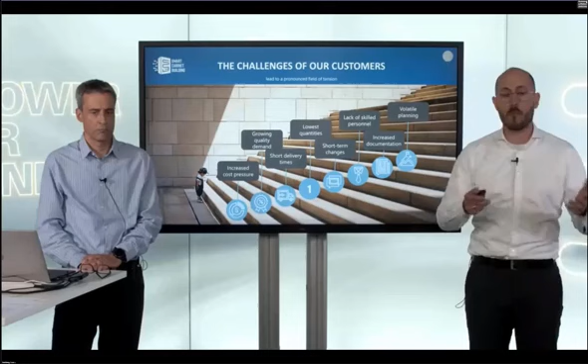From our point of view, the best way to overcome these challenges is to combine competence and know-how. And that is exactly what we do with our Smart Cabinet Building Initiative. Inside this initiative, we have Weidmüller for the industrial connectivity. We have Komax as the leading company for automated wire processing, Zuken for the digital engineering of cabinet building, as well as Armbruster Engineering for the assistance systems for manual production.

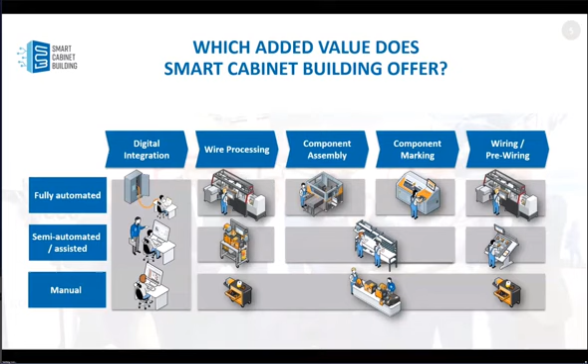Additionally, the benefit for you is we want to offer you a huge basket. From our point of view, it doesn't make sense to convince each customer to go directly the way of fully automated systems. Our target is to show you the whole range, starting with manual solutions, going further with semi-automated as well as assisted solutions, and for sure ending with fully automated solutions. And no matter if we are talking about wire processing, component assembly, component marking, wiring and pre-wiring, and also the digital integration, we want to look at your individual needs, and based on your needs, we want to create the right package for you.

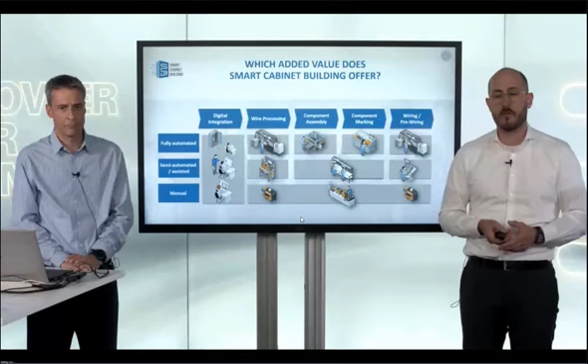I'm from Zuken, and I will show you a little bit what you can expect from the next 60 or 70 minutes. I want to start to explain with this small cabinet. Gordon, please switch. Exactly. We all wanted to meet at the Hanover Fair. This was not possible, and so we try with this event to give you a nearly live impression of our solutions. And we explain it all in the next 60 minutes with this example.

This is a cabinet with about 100 components of different types and different manufacturers. We have terminals, we have relays, and so on. We have plugs, and we have different connection types: push-in, cage clamp and screw connections. We have about 50 wires in this example, of 6 different combinations of cross-section and color. So it is a small but hopefully representative example, as you know from your daily work. So this is our physical example, and switching back to our solutions.

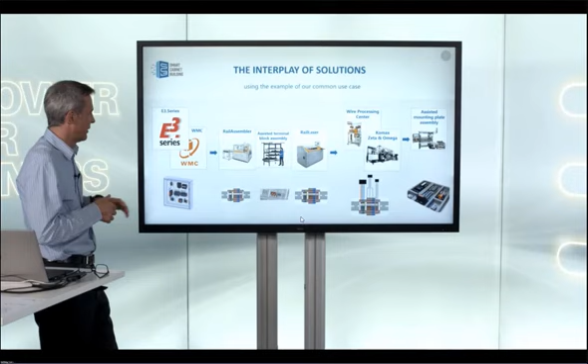And so this is the first step, how we create a digital twin. Then we will export the necessary data to the RailAssembler and to the RailLaser and to the ELAM'a workplace to complete the terminal.

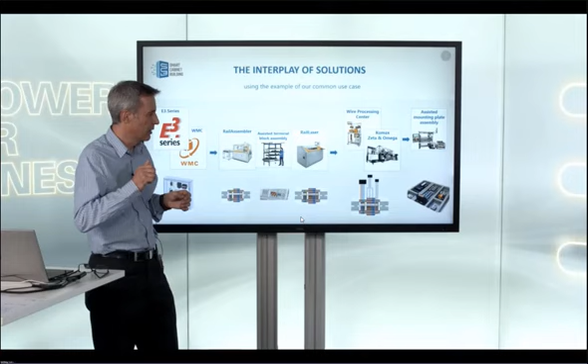After that, we show you how we can export very fast the necessary data for producing wires in 2 different ways. In a high-end solution on the Komax Zeta or Omega machine, producing bundles in a sequence order. And on the Omega, we can also show you how they will be pre-wired on the machine. And another type of producing wires is the wire processing center.

We show you also. And if we have done all the pre-production steps, then all the components and pre-assembled products meet at the assisted mounting plate assembly. And as well for this, we import or export some necessary data for this workplace. And there we have also a nice solution how the worker can assemble a cabinet without any paper in a very smooth and smart way.

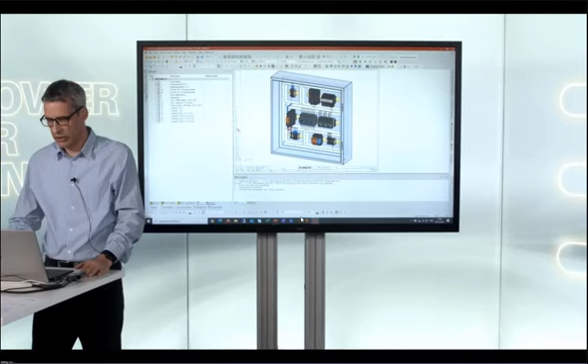If you don't get such a nice digital twin, don't be worried. I can show you how fast and easy it is to create one from scratch. I want to start with an empty project, so you can see it. There are no devices, there are no components in, just 3 empty sheets, and this is really our starting point now. There are various possibilities how to get such a digital twin.

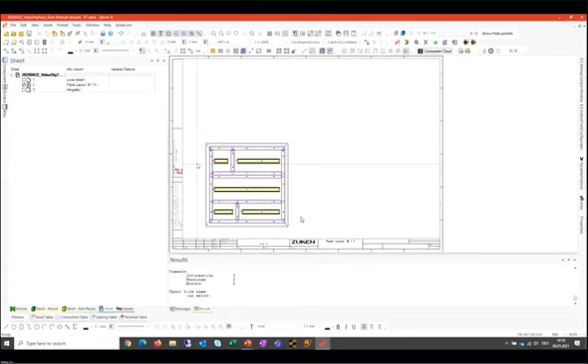As one example, I will start with a so-called template. I import an assembly of my mounting plate, and with this template, all the necessary components are loaded. We have the mounting plate with the cable ducts and the rails all mounted, finished, so we can move them, or we can change them, we can delete, we can add. If you have a typical template for such mounting plates, you can save them as a parts file and import it very fast.

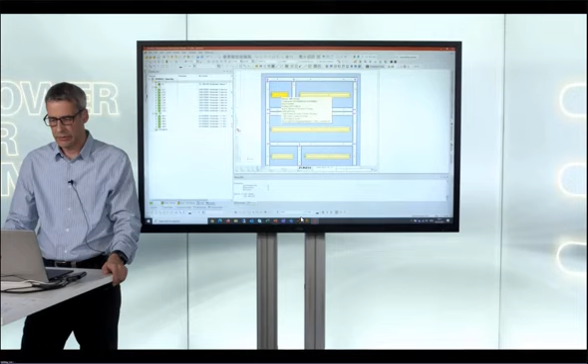So at this moment, we are able to export all necessary data for mechanical production. We can export data for mounting plate drilling machines, and for length cutting machines of cable ducts and mounting rails. So all the data is done. We know this is a one-to-one drawing, and we know exactly all the lengths and the mechanical data.

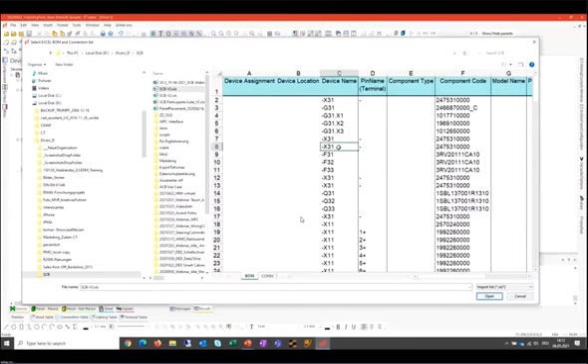Continuing with the import of the electrical components. In another example, I want to import this bill of material, these components, from, for example, an Excel file. Hopefully you get this from your clients. The minimum requirement is that we need the components, the article number of the products, and normally you should also get a device designation. If you get those, we can import it, and you can see now the 90 additional parts are loaded.

My tree is getting longer and longer, and in the same way we also can import, for example, a wire list. Also here the minimum requirement is a from-to list. We need the source and the destination pin. If you get from your customer the color and the cross section or a signal name or something else, that's fine. It's nice, all the better. The minimum is a source and a destination.

So in my case, I'm a lucky man, I have some additional information. I import it, and so now we have 46 wires imported, so they are also now in my tree, and now I have to place them.

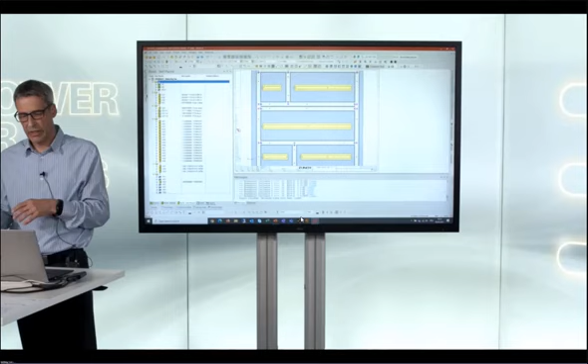If you get some data coordinates in your bill of materials, where the components are to be placed, then we can do it also automatically, but typically you don't get the coordinates, so I will do it manually, and this is very fast. I switch to the panel unplaced tree. Here are all my components I have loaded in my project, and now I can start placing them by drag and drop. Yeah? And you can see it's easy.

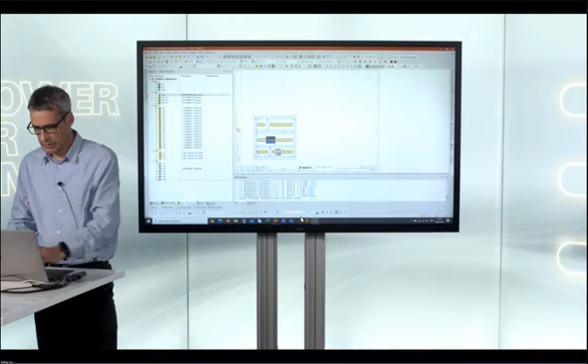I can do this in 3D, or I can do this in 2D. It doesn't matter. I can do this with single components, or I can do this with a multi-select, like here, all the relays of the term series. You can see these pink marks where I can place them, so they switch automatically.

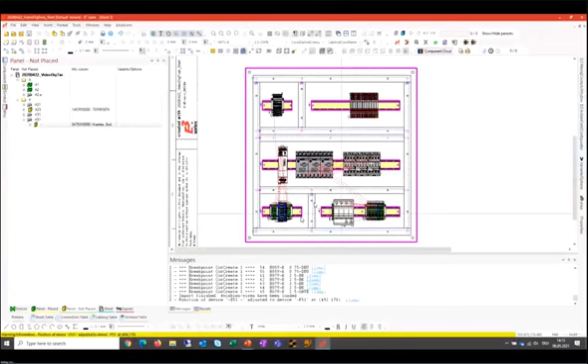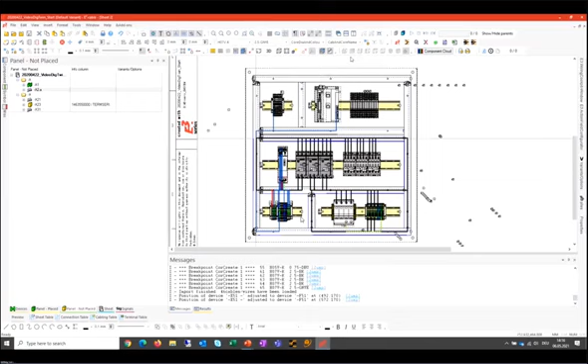And you can see also the red air lines. These are the connections. Yeah? We know from our wire list where we need some connections, and my E3 auto connect, if I start it, helps me do the auto connect in the shortest valid way. So we have now all our logical connections switched to physical connections. Now we know all the lengths, we know the cable duct fill degree, and all the other things. And now we are really nearly prepared for the next steps.

Digital twin is finished. I had some components left, but believe me that I can do it if I have 30 seconds more time. But I want to save this because now I export these two rails with all the components to assemble on the RailAssembler and on the RailLaser. So we export mounting rail 4 and mounting rail 5 to the Weidmuller configurator, starting automatically. Project is successfully created.

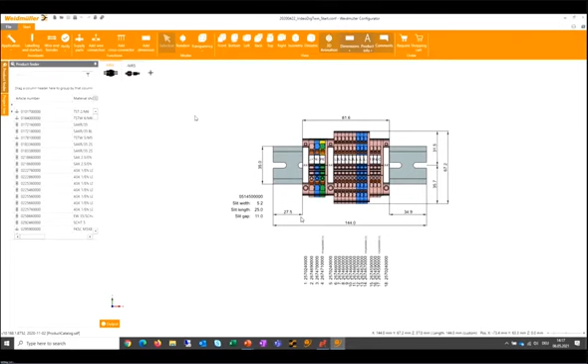Takes a few seconds. And now you can see, okay, I have imported exactly mounting rail 4 and 5, with all the components in the correct order, with the correct labeling, with the correct distances, like in my digital twin from E3. And now we can do some optimization. In this case, I rotate the marking text 90 degrees and make it bold so that it is a little bit easier to read.

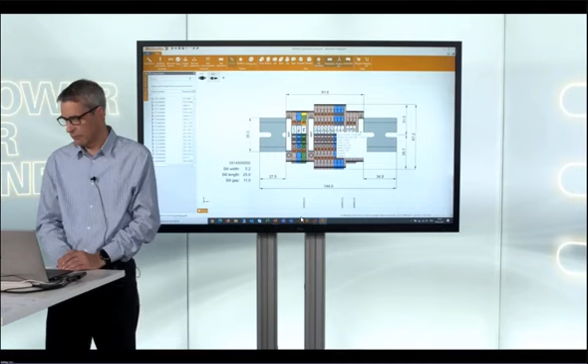And now I'm finished, and we can export this exactly to the RailAssembler, to the assisted workplace and to the RailLaser. And with this, I want to switch to the shop floor. Christian, it's your time.

Welcome back directly from our factory, where I want to present to you more details about our RailAssembler. But first of all, I think Achim already explained to you very nicely how we can come to the digital twin and how we can create all relevant information. So I would ask Luca to directly start with the production of the first DIN rail. Our RailAssembler is our economical answer for the automation of the process step of terminal block assembly. Our machine has overall 40 component magazines as well as 18 magazine places for pre-cut DIN rails.

Based on the individual order, the relevant pre-cut DIN rail is selected, transported, and we are placing directly the first terminal blocks on the rail, which we can see right now in the camera. Maybe you see the difference when you have a look at the component itself, because we are using our A-series terminal blocks as a so-called DL version, which already have pre-assembled blank markers on them for even more efficiency later during the fully automated marking process.

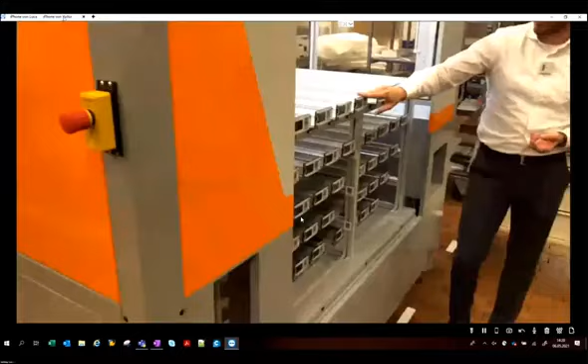My idea is we use the time while the machine is assembling the fully equipped DIN rail, and I want to explain some more technical details on the machine, and therefore I would like to ask Luca as well as Victor to come over to show our first small detail of the machine. The first detail, which is very relevant, is our universal component magazine. I said we want to design an economical solution for the automation of terminal block assembly, and one aspect there is our magazine.

This magazine consists of a reduced DIN rail profile, and based on this DIN rail profile, we have several advantages. For example, this magazine type can handle different kinds of contours. Luca, would you like to show it? So it doesn't matter if you have small terminal blocks or even bigger ones, you can use the same type of component magazine. And that is really an advantage compared to approaches where you have side guidance and a one-to-one relation between the component and the magazine type.

You already saw that also during the filling process, no terminals can fall down or out. Also, the loading volume is extended to 200 terminals, 2.5 millimeter cross-section, so that we avoid open quantities and can directly put all components in one magazine.

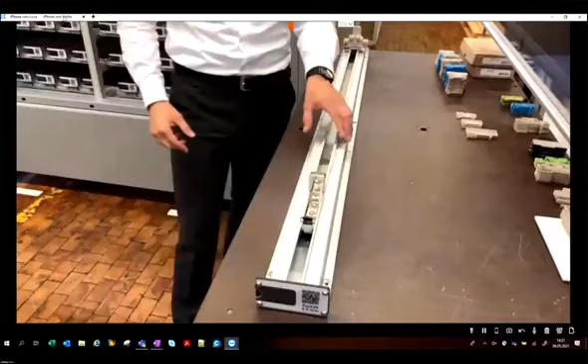Then one additional, from your point of view maybe small, but from our point of view very important point is, at the end of each component magazine, we have an area where you can put inside your individual marked and printed card with further information, maybe a picture of the components, maybe additional codes for your individual warehouse handling and so on. And that is from our point of view a small advantage which really helps you during your daily business.

Okay, so the machine is still operating. During that time, I just want to show you the area where we can find these 40 component magazines. Here we have the area for these 18 pre-cut DIN rails. The DIN rails can handle a length of 100 up to 1,200 millimeters. And if you have only small ones, you can put several on the same position. So in the end, we are talking about 18 parking places where you can put up to 1,200 millimeters inside, and it depends on your individual production order how many pieces you can put there.

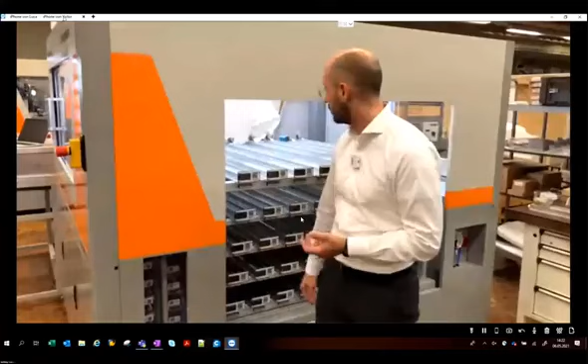So the first DIN rail is produced. Maybe Luca can take it out of the machine and we will show it to you. It's just transported to the end. And you can see it's exactly the same specification as Achim designed just a few seconds ago. Then there is a second DIN rail configuration. There I would like to ask Luca to directly start the production, and we will go back to the area where the robot is assembling.

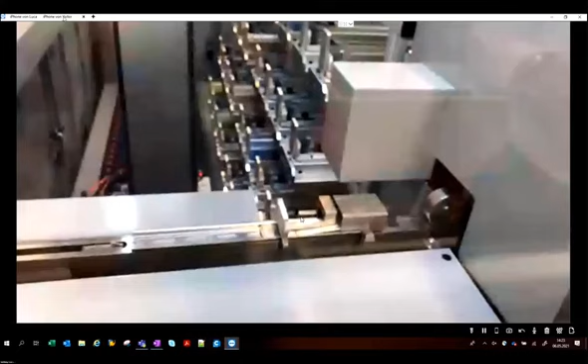Sorry for the camera confusion. In several DIN rails we have the topic of how we can handle components that aren't robot-ready, that aren't grabbable with a robot. In our approach, we give the information which components the robot can't handle to the assisted workplace of Armbruster. And this machine ignores these components, which will be assembled later with the assisted workplace solution. So you can see at the beginning we have the free space where we can later put the missing components, and that we want to show you later during one live session.

I think based on that, we understand the principle and we see how the machine is operating. We are talking about a time efficiency increase of up to 60%, which comes mostly from the individual commissioning of components and all the other steps around. The mounting itself, we are realistic, humans can do it at the same speed or even faster. But please keep in mind, if you load up all magazines in the morning, we are talking about several hours without any manual interaction.

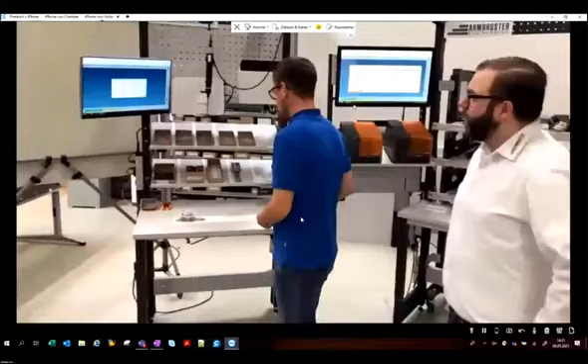All right, now we are at the component assembly, where we have the two pre-assembled terminal rails right from the RailAssembler, and we will finish them here at the component assembly station. To do this, we need to scan the production order number, and then we will see step by step the generated work instructions coming right from the export file of the digital twin, showing us where we have to place the components. We can see here that the cross connectors are assembled. And with the ELAM system, we check every step and guide the worker through the work instructions.

We also are supported by a pick-by-light system, so the worker knows where he has to take the cross connectors out. He's confirming every step at the ELAM panel and is now going through the steps one by one. The first rail is ready, and now we take the second one. Here we have a little bit of a different

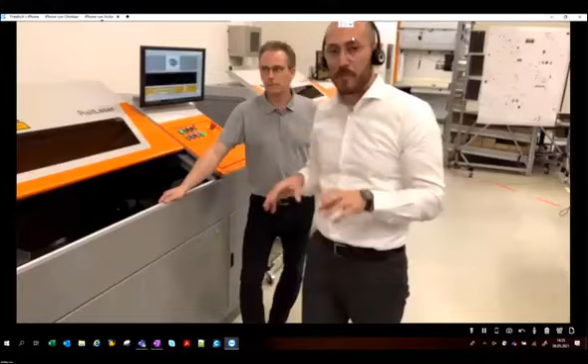We will compensate it later through our presentation, but now we want to continue with the topic of RailLaser printing. So Timo just showed you how we can assemble further components and accessories. We have now the assembled DIN rail that we already saw on the RailAssembler. And the good thing is, if we have the RailLaser there, the only thing which is still required for the automated marking processing is putting the DIN rail inside, fix it, and press the start button.

Again, we have there all relevant information from the digital twin that Achim initially generated in E3 series and then handed over to the Weidmüller configurator so that all information is understandable as well for our RailLaser. Our RailLaser can handle DIN rails with a length of 100 up to 1,200 millimeters.

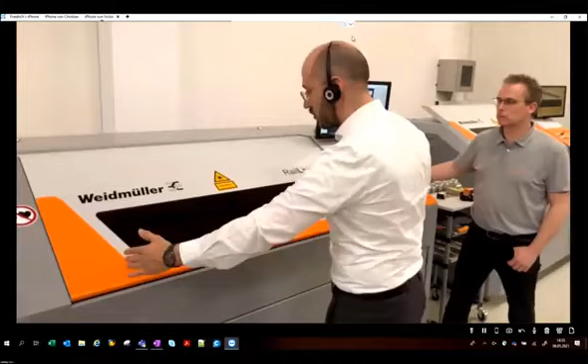And the real difference is that before we are conducting the marking process, we have there an image processing system inside that is analyzing for each marker the real position, compares this position with the digital twin, and is conducting fully automated the required adjustment so that we can really be sure that we mark directly in the middle. And we are doing this from several sides so that we can also, for example, reach markers that are in a gap between bigger components.

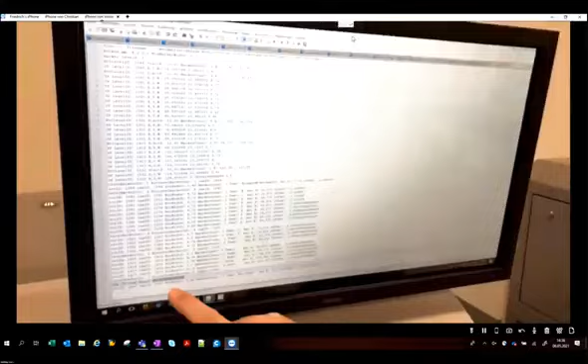And you can see here in the screen that, for example, for the end brackets, we are still analyzing two positions. And based on that, we even analyze the angle compared to the DIN rail. Stefan is showing you now an example how we can do the correction. And we also can show you the real information that is analyzed by the image processing. For example, in this case, 90.97 degrees is the angle of the marker relative to the DIN rail.

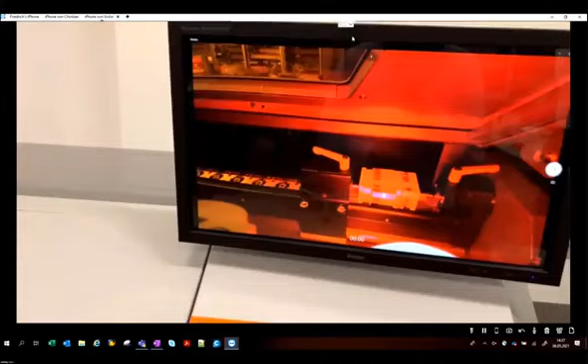In the background, the last steps of the image processing analysis are conducted, and the machine will start then with the layout generation, where we are analyzing which markers can directly be reached without any mechanical movement. And now you can see directly inside the machine with a webcam, and you can see that the laser marking itself is quite fast.

And one additional benefit is, based on our laser source, you can use our standard marking material. So you don't need to have any special marker material for the process step of the automated marking. You can use the same marker also like for our PrintJet. For example, if you need to print anything in color, I think it makes it much easier for you.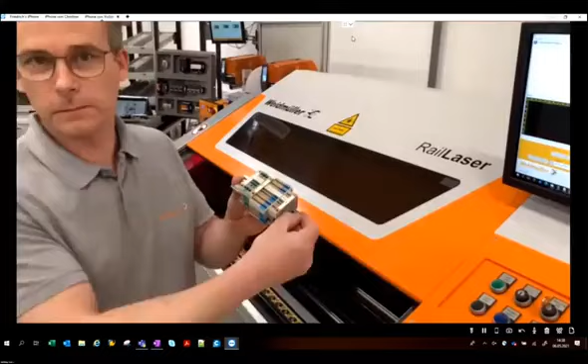So the first marking process of our first DIN rail is nearly already at the final stage. Just the last markings, door is opening, and there we have the final DIN rail, which Stefan is now showing to you directly in the camera. And you can see there that we have a very sharp contour and really precise marking all around the DIN rail. So that was just our first example.

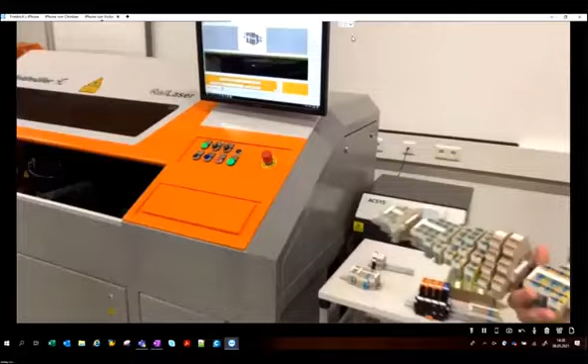I want to take the time and show you a little bit more the universality of the machine, so which kind of different terminals we can handle. We can handle for sure big ones, small ones, and exactly also this kind of gaps or deeper areas we can also reach with our image processing inside. But we not only can mark terminals, we can also mark, for example, overvoltage protection components. Exactly this one that a few minutes ago Timo and Malte showed us at the assisted workplace of Armbruster Engineering.

So Stefan is also putting the DIN rail inside and pressing the start button again. We show also the operator a preview so that it's easy for him to put the DIN rail inside in the right position. And then again, our procedure with the image processing is starting and analyzing.

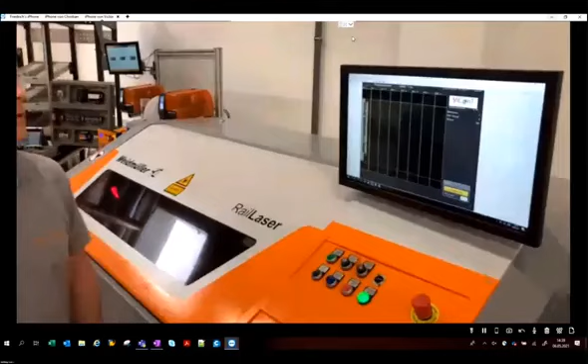One additional benefit is that the marking itself has some advantages because it's very robust, and not only on the rail. We can maybe show you some more examples and a little bit about the topic of time efficiency increase based on the DIN rail that we have put inside the RailLaser.

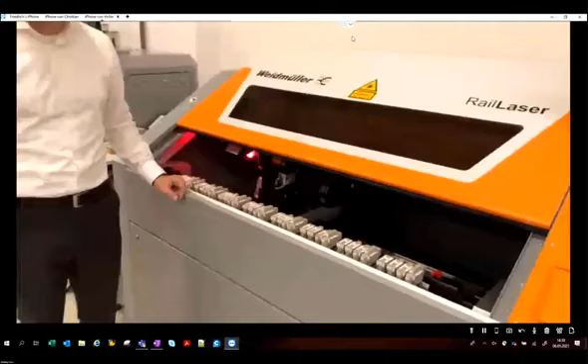This DIN rail is 1,200 millimeters long. The manual production time for this DIN rail is roughly 60 minutes for finding the right markers, printing the markers, snapping them on, and having a final inspection. With the RailLaser, we are only talking about 6 or 7 minutes for the fully automated marking process. We also have some more examples of different contours, different configurations, different sizes that really show the universality of the RailLaser.

Maybe you are asking, okay, nice, we have the A series DL version, but what if I need a component and want to mark it with the RailLaser where Weidmüller is not offering a DL version? Then my answer to you is, you can also put the blank markers on it manually. And even then we are talking about time savings up to 60%. For sure, compared to the 90%, it's a huge difference, but I think even the 60% is really a benefit.

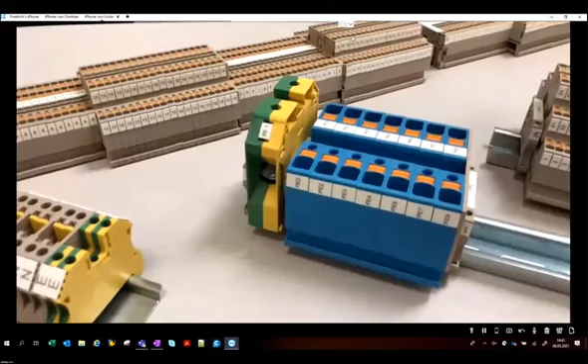And if you remember the video that we showed during the first coffee break, you also see there that we are using our image processing for checking if the assembly, especially of the markers on the terminals, is done in the right way. And we are guiding the operator if something is wrong. Based on that, we have more or less a dynamic quality inspection inside. And that is also, I think, a big benefit for you as well.

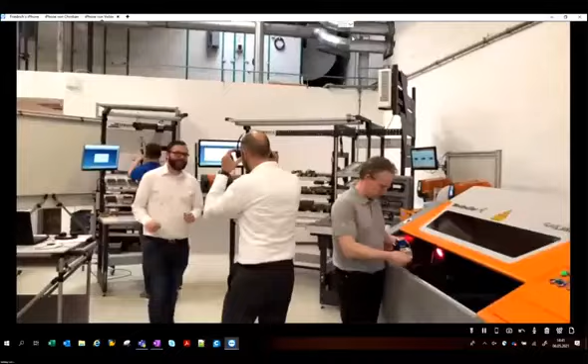Okay, so that's just a short explanation regarding the RailLaser. My proposal is, since you couldn't hear what Timo was saying, we just repeat the session directly at the assisted workplace, because I think it's also very interesting for you to understand it. I will hand over the headset to Timo again. Thank you very much, Christian.

So yeah, as I was saying, this is the component assembly where we get the two terminal rails from the RailAssembler. They came pre-assembled, and we are finishing them up here. To do this, we start by scanning the production order number, and now the ELAM system shows the worker, dynamically generated via the digital twin, exactly what steps need to be done to finish the terminal rail. We are also supported by a projection system, so we see directly on the table where the components have to be placed.

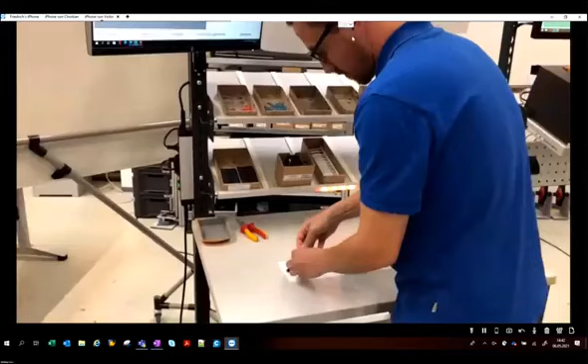And the worker now goes step by step through the completion of the terminal rail and confirms it on the ELAM panel, step by step. We are also supported by our electronic screwdriver. So we are monitoring the screw process in the ELAM system and documenting the angle and torque, placing the markers, confirming it again.

Now we have some cross connectors that need to be placed. The worker can lay it down on the table and see right in front of him via the projection which cross connector legs he has to pull out, confirming it, placing it. The pick-by-light system also shows where he has to take the cross connectors out. And the next one, and the last one, confirming it. And now the terminal rail is completely assembled. All right. Now we go back to the studio.

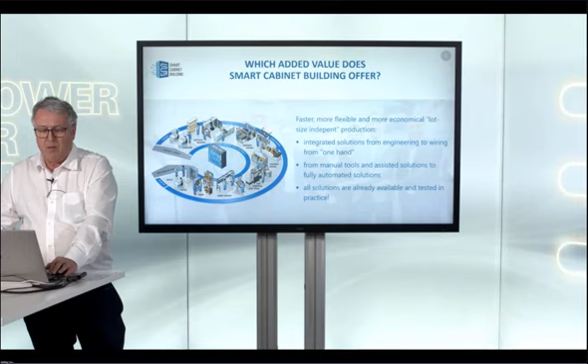Hello and welcome from my side. My name is Hans-Peter Blair. I've been working for Zuken for more than 20 years, and I will give you some information about the export to Komax: how we can export data from our digital twin to the Komax machine to pre-manufacture wires, make sequence bundles for wires, and also send information for block loading.

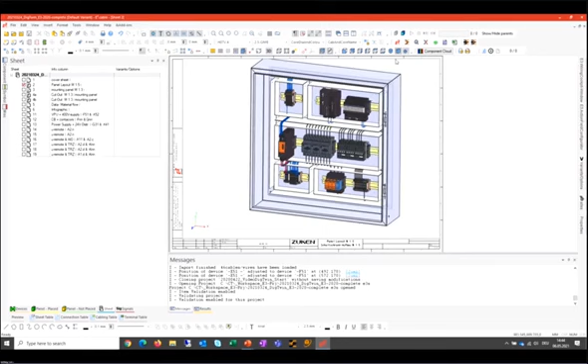So we are in the process here. With the RailAssembler, we did the terminal rows and so on. We did the marking, and now we are sending the information to the Komax Zeta or Komax Omega. Let's switch over to E3.series. Here we have E3.panel, the 3D panel layout. Let's have a closer look at this panel layout.

Here you can see some wires connected to a connector, connected to a terminal strip. When I hit the wire, I get information about the wire type, the wire color, cross-section, and of course the wire length. This information, and also the information about the terminals for the block loading, we now want to send to the Komax machine.

Therefore, we have an export. As you can see here, we export this information now to the Komax machine. And you can see we have exported 46 wires, and these wires are collected into 6 bundles.

So there are a lot of checks. There is a configuration file which gives the information which component we want to export to the Komax machine, and also we will check a lot of things depending on the configuration of the Komax machine itself, which wire is available, and so on. And as you can see, we have produced a CSV file. That's the file we will send later to the Komax machine.

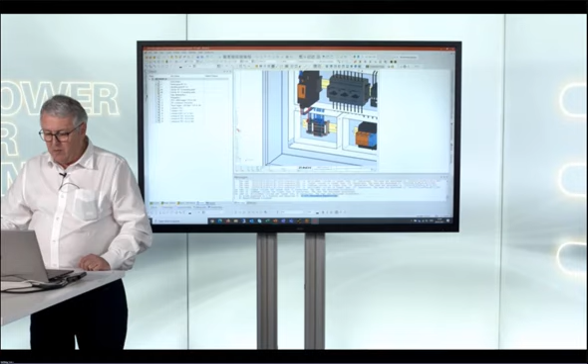Let's have a look at this file, and we start the Windows Explorer. We want to have a look at this file. So this is the file we have created, and you can see a lot of columns, and to make sure that you can see what's inside. So we are exporting the information about the article name of the wire type, the wire color, then the wire length, of course, it's very important.

We have the stripping lengths on both sides. We have the ferrules on both sides, and we have the information about the marking. So this is target 1, this is target 2, and then we have additional information about the text, the font, and so on. So this information can be used one-to-one on the Komax Zeta, and so you can see how this works. We will switch to Komax in the production hall.

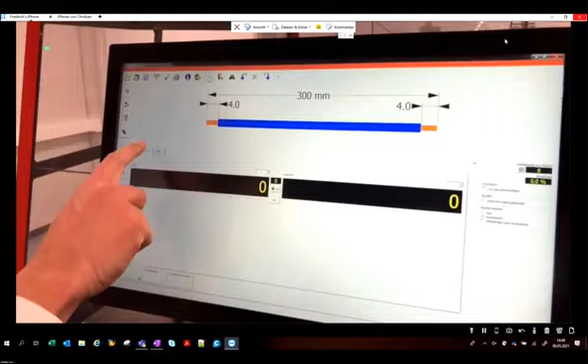Here we have the messages which arrived, so we can see there are 6 sequences ready. So these are the 6 sequences designed in the CAD. I can just select the first one, load it to the machine, and start now the production for the whole sequence. To learn more about how the machine works, we will move around

to the wire selector. The wire selector holds up to 36 wires of different colors and sizes. It covers cross sections in a range of 0.22 to 6 square millimeters, or AWG 24 to 10. A powerful belt drive will then pull in the wires, and its length is accurately measured using a length measurement encoder.

In the next step, the wires can be marked using an inkjet, where we can mark the wires with both black and white ink to achieve the best contrast for your freely configurable text and markings. In the next step, the wires are then cut and stripped to the expected length. We can now either just leave it half stripped, so we can process it manually later on, or we can

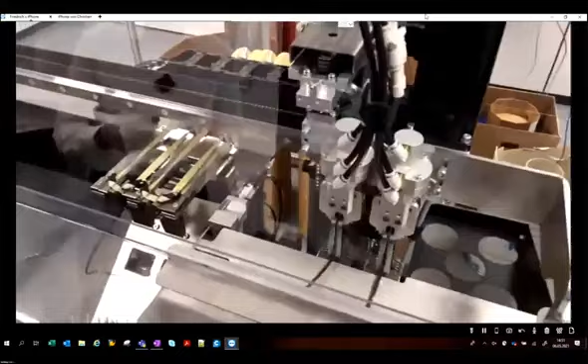At the end of the process, we have the bundler, which stitches the wires together, either in sequences or bundles, so you have it nicely sorted in the end. So, let's have a look at the result now.

Here we can see now such a sequence. We have the marking on the wires, and we have exactly the correct sequence for a component in your electrical cabinet. So attaching it, mounting it in the cabinet is very simple, very straightforward, without lots of documentation. And this whole process will save you up to 50% compared to a fully manual wire processing.

As an alternative solution to the sequences, we can as well attach the wires directly to your casing, your components, and therefore we can use a machine called Omega, which we will now see in a video. Please start the video.

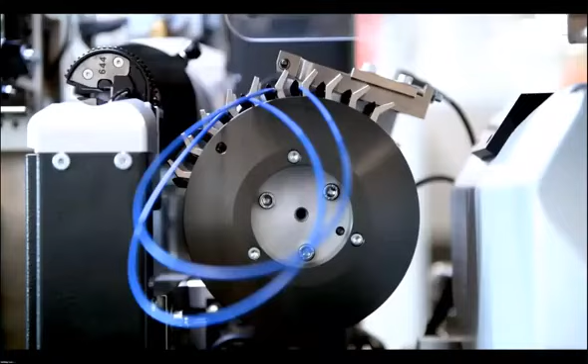So the first part of this machine works exactly the same as the Zeta machine we just saw. The wires are loaded, cut, stripped, and then with different modules, the wire end processing is done. But now we'll have a sequencer. The wires get visually checked, oriented, and then directly placed into your housings.

The machine has two sections. In one section, the wires are attached, and in the other section, an operator can safely remove the whole modules from the machine and attach the new components. So this is the final result. So you see there's a fully automated process, and this is now how we can turn your data directly into a physical product with a minimum manual workload.

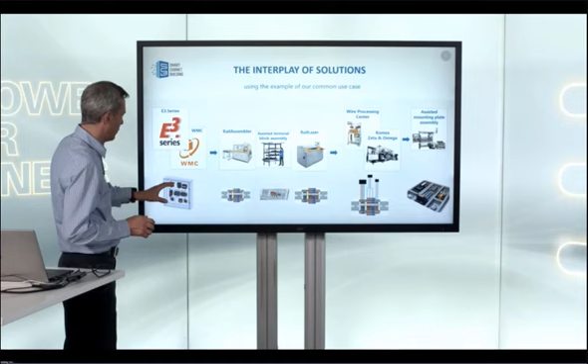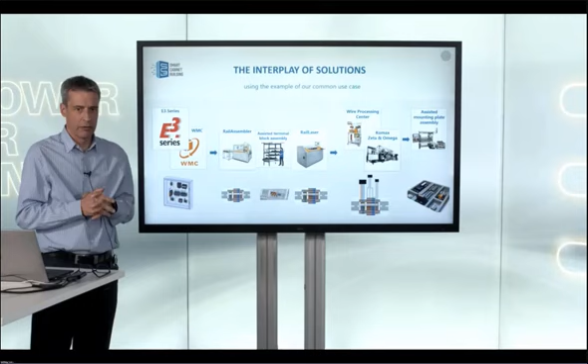Now, coming from the impressive machines back to hopefully impressive software. The next step in our presentation is now showing the export to the assisted mounting plate assembly. We have seen in the last 40 or 50 minutes the pre-production of all the necessary assemblies and components and wire sets and so on. And now we want to assemble them to a complete cabinet. And we have also a small smart tool to create these work instructions directly out of the digital twin.

And to explain this, it makes sense to switch to my panel placed tree. So E3 series has a hierarchical structure. So E3 knows which component is placed on which other component. So if I have here my mounting plate, it's now in pink. We see, okay, we have a lot of cable ducts, we have some mounting rails and so on placed directly on this mounting plate. And on the mounting rail 1, for example, we have some other components like these terminals and so on, and mounting rail 3. So we have exactly this hierarchical structure. And we use this to export this to our ELAM system.

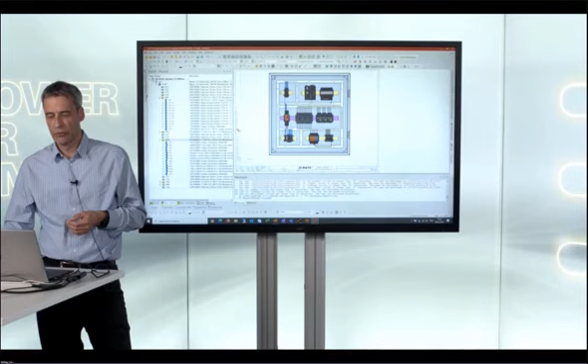To handle pre-assembled assemblies or components, it's very easy. We only have to select them and say, okay, you are pre-assembled. Then the whole bunch is handled en bloc. And we have a small simulation tool to check these just before exporting. We have to start by a mounting plate and then start the, sorry, stop, we start here.

And the rule is now we start from the mounting plate, and the first one is done with the rails. The first rail is the rail 1 on the top left. This is a pre-assembled rail, so we also get all the terminals on it. Next one is the rail 2, it's empty, rail 3 is empty, 4 is pre-produced as we have seen on the Komax Omega machine, and so on.

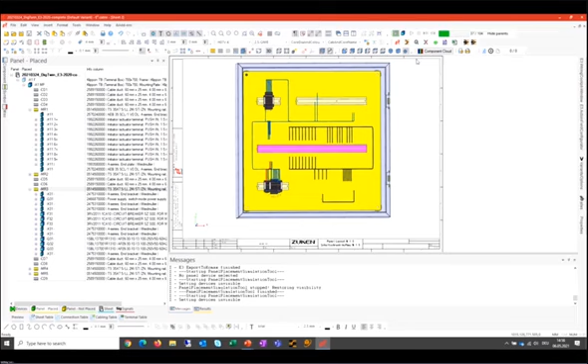After the rails, the cable ducts are being placed, normally always from the top left to the bottom right, and then the components which are on the mounting rails are placed. Also the same from top left to bottom right, step by step, and so on. And so this would be the exported working instructions for the ELAM. We see, okay, now we have 104 components assembled, and creating this file is child's play. It's just one click, and now we have an XML file we can read one-to-one into the ELAM system.

This is a very easy algorithm, but I think it's a very comfortable algorithm of how the sequence is. If you want to change the sequence, it's very easy also in ELAM to say, okay, I want to assemble mounting rail 3 before 2. But important is that you get everything in this file, all the components in the right order with some additional information, maybe hyperlinks to additional documentation and so on. It's all exported from E3, and you have less work in the shop floor to pre-produce such working instructions.

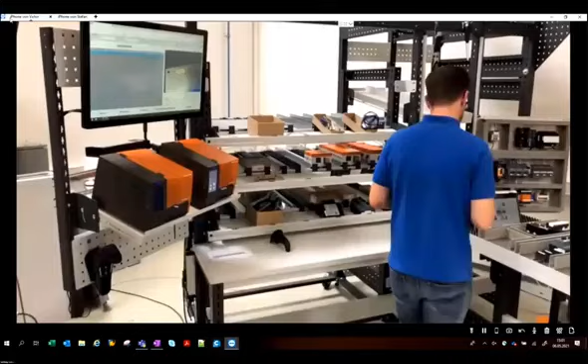All right. So now with the export file from the E3.series, we can now go to the cabinet assembly for the mounting plate. And via the export file, we will now assemble the mounting plate via the ELAM system. It's the same procedure. We have the digital twin file, and we are dynamically generating the work instructions as shown here. And we are going step by step through the assembly process.

First thing is to put the label on. Next steps are the cable ducts. And the specialty here is that we are projecting everything right on the mounting plate, so the worker can directly see where he has to place the parts. At first, the cable ducts.

And after placing the first cable duct, he confirms it again in the ELAM system and is now taking the second one out of the pick-by-light supported area and placing the second one here, also supported via projection directly on the mounting plate, confirms it in the ELAM system. And now we have a serialized component that we are tracking in the ELAM system via a scan.

So now he scans it. The system confirms that the scan is valid. And now he places it directly on the mounting plate where the projection is showing it. And now we have the pre-assembled components, the pre-assembled terminal rails that he's placing on the mounting plate using the screws.

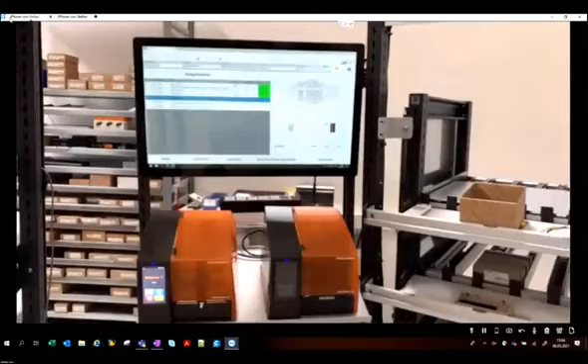You can see on the ELAM panel that we have a list of the components that he has to assemble right now. You can see 3 of them are already marked in green, so they are already assembled. And he has 3 plug-in connectors to do. The first one is now to be assembled.

And here we have a crosshair to show the worker exactly where he has to connect the plug-in connectors on the component itself. Confirms it again. And the last one, also confirms it. Everything is documented in the ELAM system.

And now we are coming to the Komax wires that we have to place. In this case, we are using the wiring cockpit. So the worker can see where he has to wire the wires, and also confirms it right in the wiring cockpit. And so he takes every wire from the Komax and assembles them. And now we are switching to the WPC.

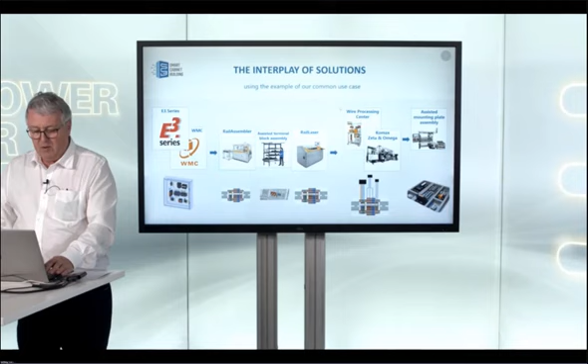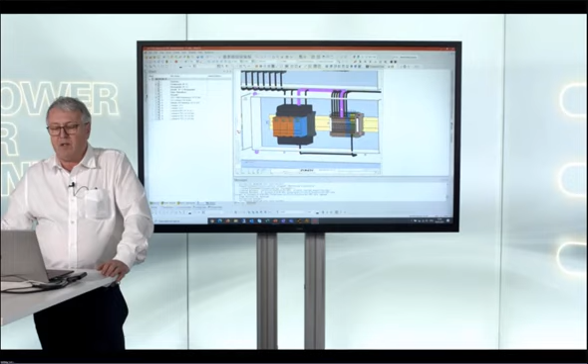So when we export wires, you see here's another wire, here's another wire, and when I jump to my panel layout, you can see this wire here in the 3D layout as well, and from this information we get the exact length. So we can export the wire information only from the wiring diagram if we have some lengths here already. Otherwise we can export information from the panel layout, and normally our customers do this in combination, so they have the object orientation with the direct link between the wiring diagram and the cabinet layout.

So we can export this information now. You can see it here. I have a button, Weidmüller WPC, and I will export this information now. As you can see, we can also export dynamic cables, so let's do this. Yes, we do. And now you should know the WPC can handle wire cross sections minimum 0.5 and maximum 2.5.

So it has generated this list. So we will save this list for the WPC. Yes, we save this one. And here you can see in the messages, there were some checks done. I told you that we have a cross section, which is 0.5 to 2.5.

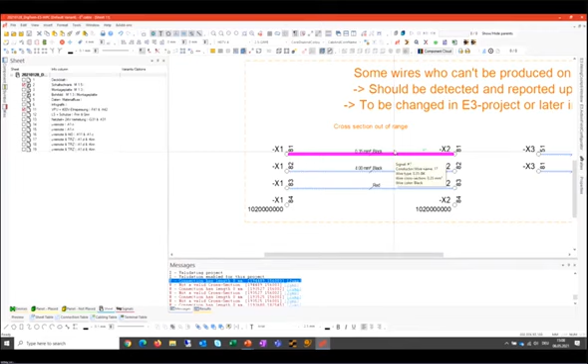And here I have a wire which has only 0.35. This will not be possible. And also we can check, for example, if the wire has a length or not. So here the same wire we have has no wire length. And also we can check if there is the wire color. For example, here I have a wire which has no wire color, and so I will need this information, and therefore this will be checked.

So I can send this information to the WPC, and let's have a look how they will handle this data. And so we switch into the shop floor and we will see what they are doing with this data.

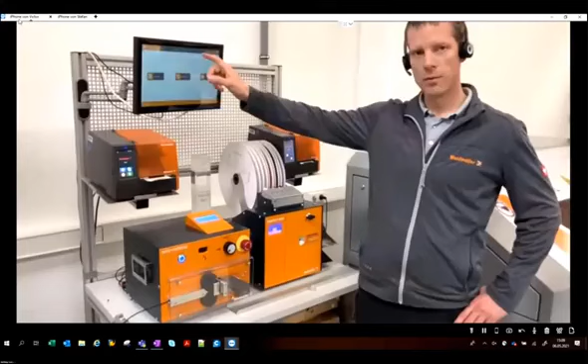So we have equipped those machines with state-of-the-art interfaces and a certain protocol so that they're able to communicate with one another. The WPC is a mobile workshop wagon, so you can place this anywhere in the production site. Down the desk you have a cabinet with an IPC, so industrial PC, that is running the software, illustrating the worker what to do, and also steering the machines.

So key thing is, you will open the processing list that was just transmitted by the colleagues from Zuken E3. So here you have one-to-one the list that was transmitted. When speaking about flexibility, for example, you could choose that maybe the printing should be done separately so that you skip the printer out of the communication process.

When you want to get started, so in total, we still speak about the semi-automatic approach. So we have different kind of cross-sections in here. Right now, 6 pages with different jobs, could be 100, could be thousands. So you need to physically install one of the wires in the cutting machine. So in this case, we have the black 2.5.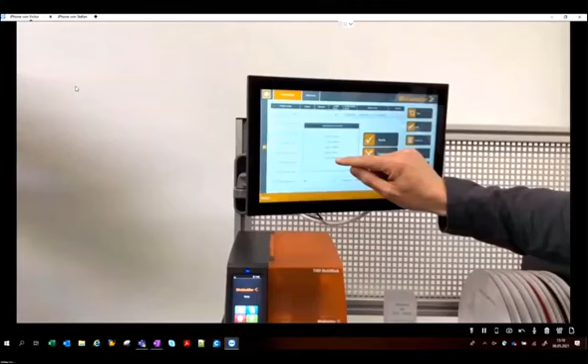Now you proceed to set the cross-section to the 2.5s, actually the black ones, accept the filter settings, and then you have reduced the cutting jobs only to the 2.5 black wires. Now you can easily say, okay, I want to get started. Before it starts, you get a short executive summary on what will be done in the next second. So if you start the process, the magic runs.

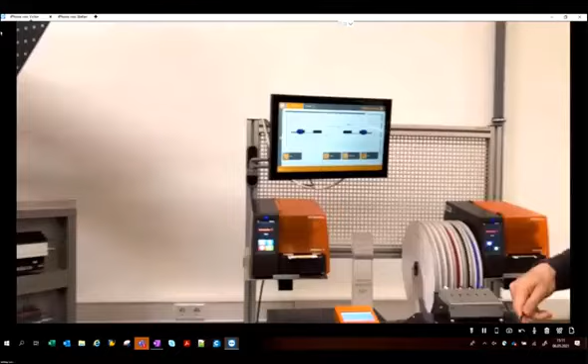The cutting machine is cutting the cable 400 millimeters. In parallel, the printer is getting the data, and also the crimping machine is adjusted to the right cross-section. So now we simply place markers on it. When speaking about the markers, we have different kind of variants, so whatever fits for your application, it can be installed on the printer.

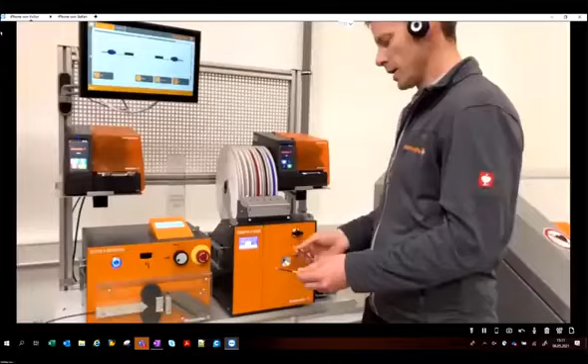Now nothing is happening because we're waiting for the worker to bring the cable into the crimping unit. So first crimp, second crimp. Now one piece flow ready, next job starts automatically. And this is when we speak about process safety also. So the software is telling on what to do. So 2.5 cross-section. The worker is not able to change to any other cross-section.

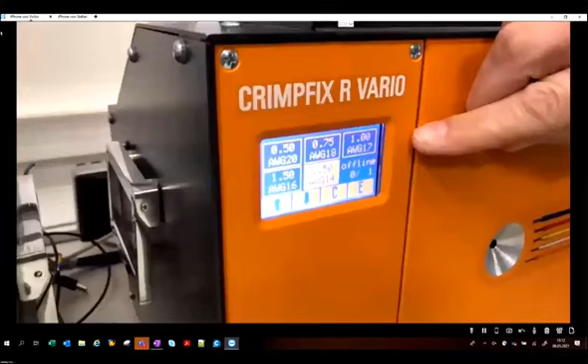What is actually possible, if you touch on purpose and activate the standalone function, then we are switching to offline modus. For example, if another worker is coming, wants to process very quickly a bunch of cables, 50 pieces, you can easily switch to the other cross-section and finish those crimps. Afterwards, switching back to systems approach, we are in online modus, and the other worker can go ahead with processing. This is very important when speaking about process safety.

So the software is the brain of the system, and it is not a must-have that a specialist needs to run on the system. Could be also other people, so that everybody in the company can focus on value-adding activities. What is also possible when we speak about how to get data here on the job: one very smart way we have seen over Zuken E3, you can also bring in jobs here very easily over the quick start function.

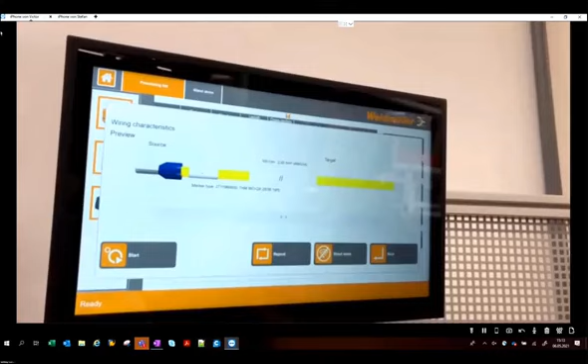So a neutral conductor is being shown, and you can easily put something on the spots here, and so choose a cross section given in a certain length, number of pieces, let's say 6. Another cable color. Maybe on the second side we don't know the concrete lengths, so we start like this. Before it starts, actually, this will show right now the result on how the finished cable should look like. And if we would now start the job again, the magic would run just once again.

The WPC approach will be developed further on. So we speak about regular coming software packages and also new hardware features. So one change, in very short term, will be a new cutting machine where we also have a multiple feeding unit. This is not yet in, but I will show you a short video of the standalone function; implemented in the WPC approach it will be roughly in June. Now please switch to the video.

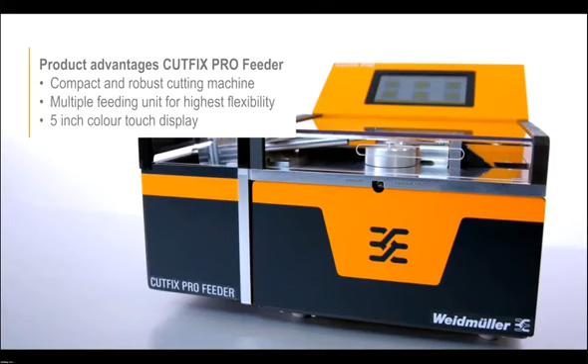So in a standalone function, we have launched this officially at the Digital Hanover Fair. So here, this is a very compact cutting machine with a 5-inch color touch display, and on the left side an implemented multiple feeding unit. So here you can easily implement up to 12 wires. What you need to do is teach the software in which slot you have which particular wire. So this is a one-time effort at the very beginning, and afterwards in the quick start function you can easily bring in different cutting jobs.

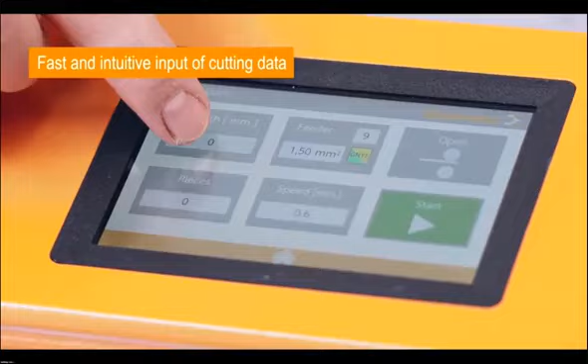You will see how the changing of cross sections will run. So in the quick start function, very easily simply adding a job, so 250 millimeters, 3 pieces, and then you could choose the according slot where you have the right cable inside. Now it's brought into position and we cut the 3 wires 250 millimeters.

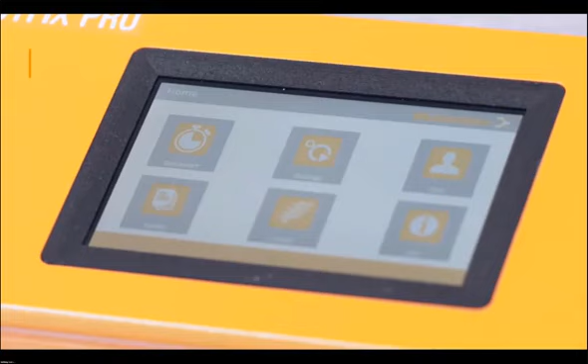Next you would simply go back to quick start. You could change the cutting data; if it's the same length, just another cable needed, you simply go for the other slot. The machine is bringing the new cable into position and the other cross section will be cut very easily. This is for sure bringing the WPC to an even more flexible approach. And again, this will come in June.

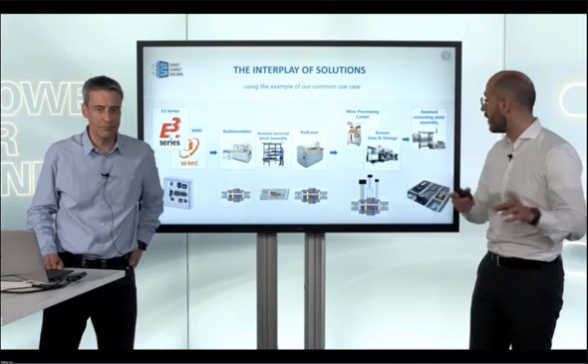So we started with the digital configuration of the digital twin in E3 series. We then transmitted the data to the Weidmüller configurator, so that it's also understandable for the RailAssembler assisted terminal block assembly as well as the RailLaser. And then we showed how we can bring the data information over to the Komax machine for the wire processing or even pre-wiring. And we used all information for putting the kits together for the assisted mounting plate assembly, as well as for some last wires which are produced with the wire processing center.

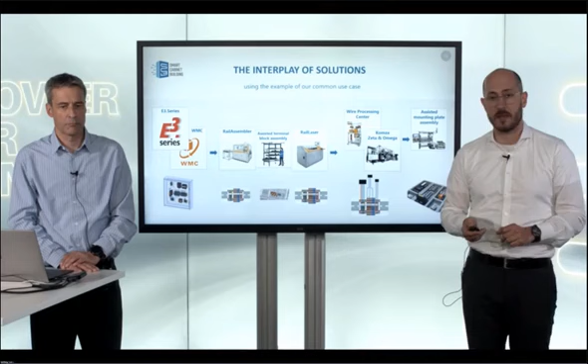And from our point of view, we hope that you understand that based on the solution of the Smart Cabinet Building Initiative, you are able to produce faster, more flexible and more economical, more or less lot size independent. So we discussed several times the dynamic interpretation of the work instructions. We showed how easily we can come to the digital twin and so on. So from our point of view, it's also a topic for lot size 1 as well. We showed you an integrated solution from engineering to wiring from one hand. We showed manual tools, assisted solutions up to fully automated solutions. And you see that all of these solutions are already in daily use and are available.